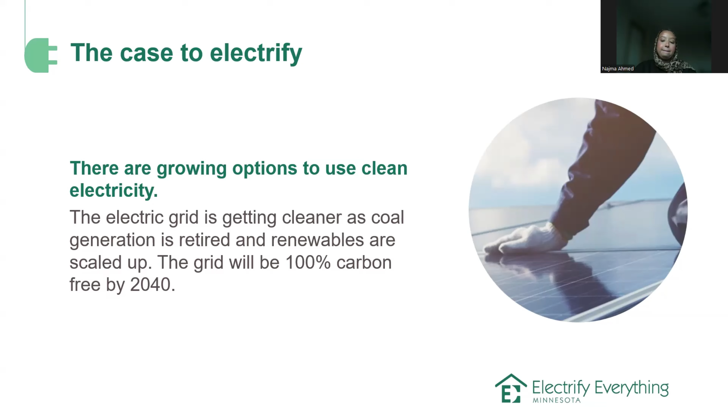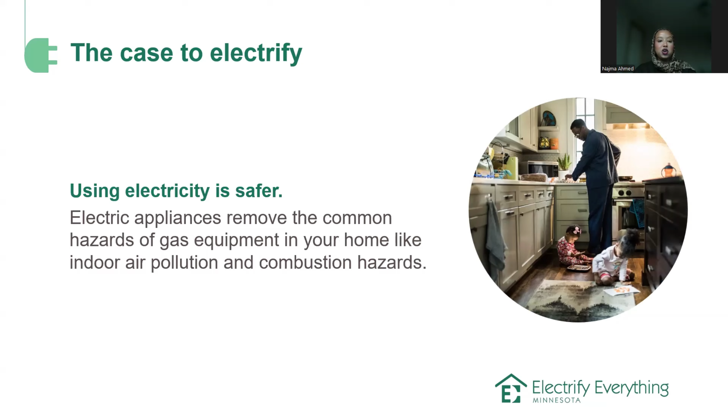Another reason why we should electrify is that using electricity is safer. Electric appliances remove the common hazards of gas equipment in your home, like indoor air pollution and combustion hazards that gas appliances leave behind, which in general are not safe for us. So it's much safer electrifying your home.

Another reason is that electricity rates are more stable. Electricity rates historically grow at an incremental pace, while fossil fuel prices like natural gas have had much more fluctuation. One reason is that electricity prices are regulated by the State Public Utilities Commission, so they have to mitigate prices and rates, whereas gas prices depend on other factors such as supply and demand, global markets, and other events.

Lastly, another reason why we should electrify is that electrifying our homes makes a difference for the health of people and planet. I talked earlier about safety and how it has an impact on our health, and how gas releases indoor air pollution. But another reason is the planet. If you're someone who cares about climate change as well as the negative impact we're leaving on the planet, I think this is a great way to contribute positively to change.

Now that we know what electrification is and why we should electrify, there's one challenge to it, and that is electrification can be confusing. If this is your first time hearing this word or you're starting out your projects, homeowners often have a lot of questions. Some of these are: how do I decide which projects to pursue? Earlier, I mentioned this is a gradual process, so deciding which project to start with first and which to prioritize is one challenge people often face.

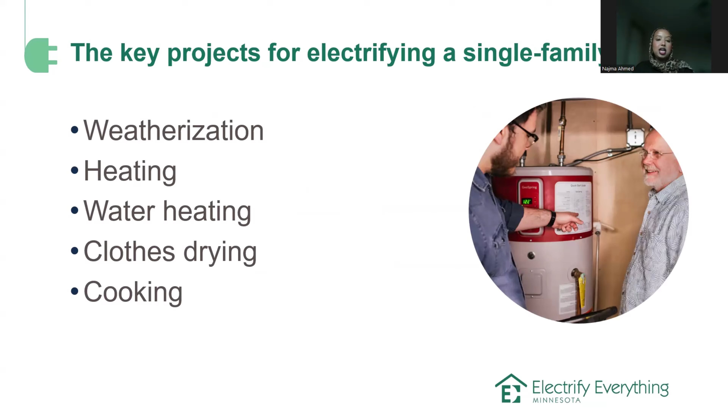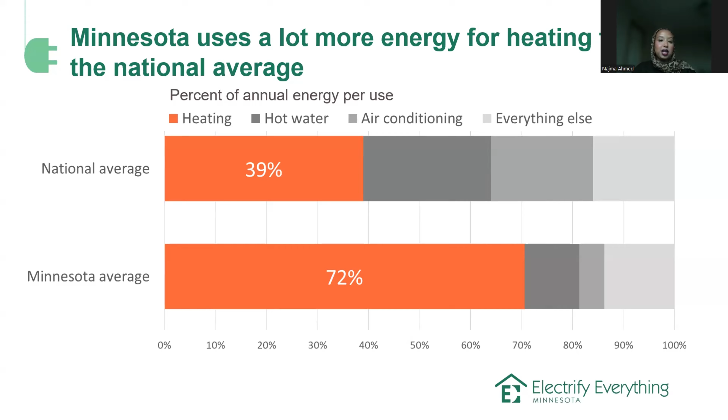The key projects for electrifying a single family home are weatherization, heating, water heating, clothes drying, and cooking. So why do we talk about weatherization when we talk about electrification? Because 72% of the energy usage in Minnesota goes towards heating the average home, simply because we have harsh winter months. Compare that to the national average of 39%. Overall, Minnesota uses a lot more energy for heating than the national average.

Two questions come up when we talk about how to save energy and boost sustainability: how much heat do our homes need, and how are we providing that heat? Weatherization involves improving the parts of the home that keep heated or cooled air from escaping, making sure air inside your home remains inside and outside air doesn't come in. We're talking about insulating your walls and attics, the fluffy stuff in your attic, air sealing to prevent air leaks, and treating windows, as weatherization makes electrification easier and more effective.

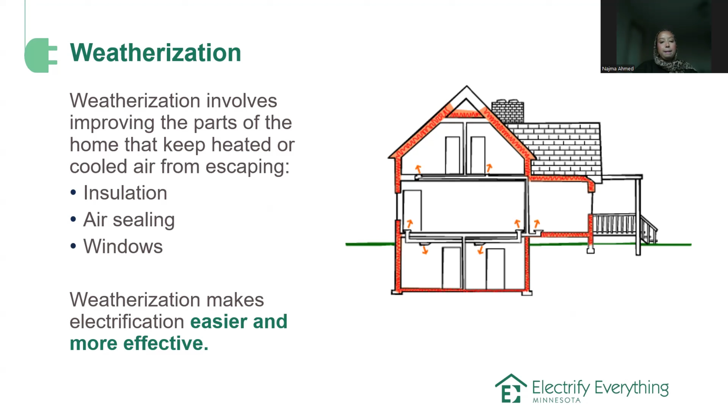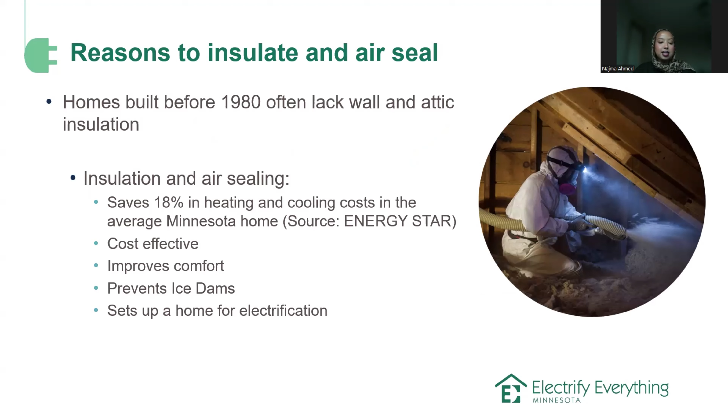Reasons to insulate and air seal are that homes built prior to 1980 often lack wall and attic insulation. A home that's well insulated and air sealed saves you about 18% in heating and cooling costs in Minnesota. It's cost effective, it improves comfort, it prevents ice dams, and lastly, it sets up your home for electrification.

Air sealing is making sure there aren't little nooks and crannies in your home where air can escape or come in, which is why air sealing is an essential part of insulation work. Common areas where air leaks happen include attic hatches, areas around lighting, vents and chimneys, and rim joists in basements. Lastly, mechanical ventilation like continuous bath fans maintains healthy indoor air quality in a well-sealed home.

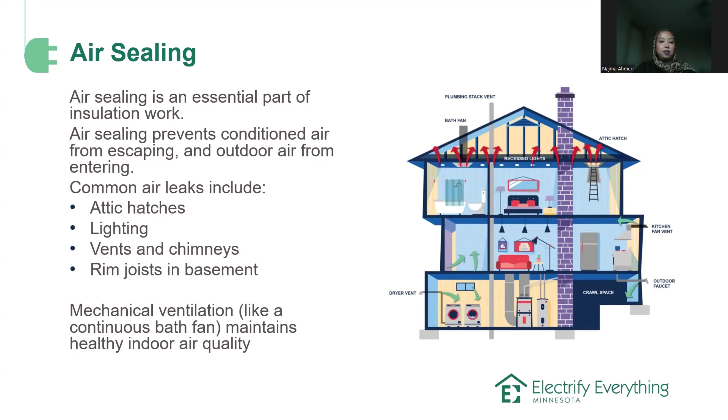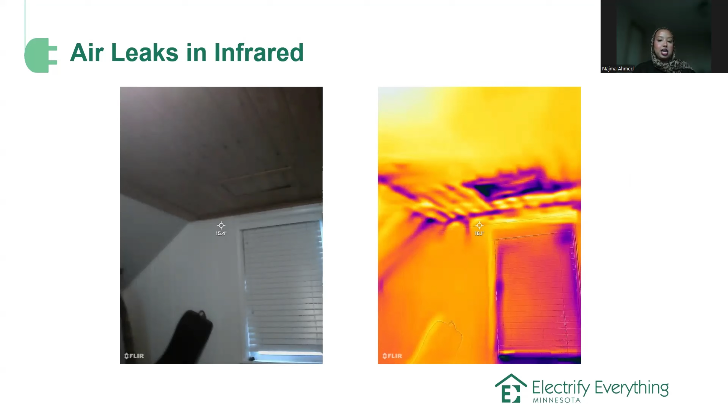Weatherization is critical before addressing heating because weatherization makes electrifying your home's heating much more affordable and effective, and it reduces heating load an average of 18%. So a heat pump can work more effectively.

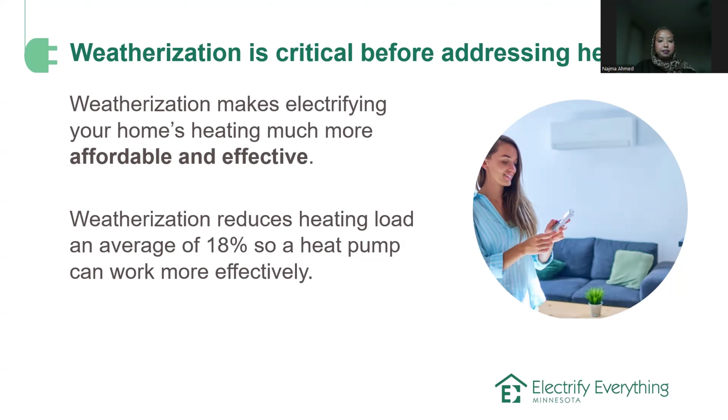Okay, so Najma mentioned these two questions about saving energy. How much heat do our homes need? How can we reduce the amount of heat and energy that we use to heat our homes? And the second question is, how are we providing that heat? And I'm going to talk a little bit about that. So next slide.

Okay, first of all, my question for you all, and you can respond either in the chat, you can type up an answer, you can use the React. There's a little graphic heart at the bottom. Do a react. Put something in the chat. Let me know if you've heard of heat pumps or not, or maybe a little bit, yes, but a little.

Okay, I see a green check mark. Laughing, crying emoji. Good. I don't know what that means, but you know. Oh, it's a thumbs up.

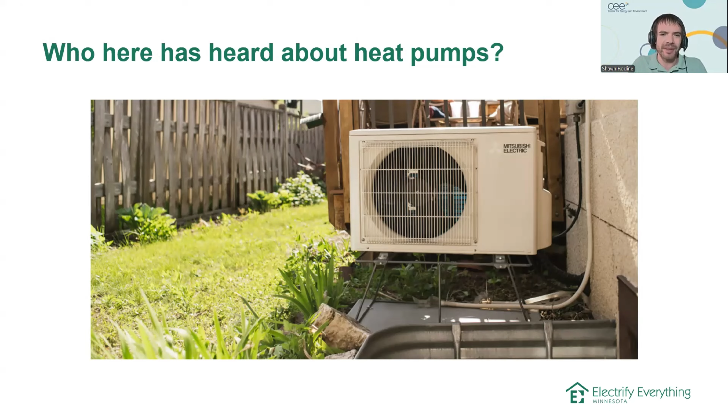Okay, great. Okay, so we got a couple people who've heard about heat pumps. And if you haven't, well, you're in the right place. Next slide.

So heat pumps are pretty cool and also very warm in that they're a very efficient technology, but they're not necessarily revolutionary because a heat pump, what it essentially does is it moves heat or pumps heat through refrigerant like a two-way air conditioner. So if you had a heat pump in your home right now, it's still summer, still in the 80s. Your heat pump would work like an air conditioner. It would pull heat from the inside of your home and pump it outside and then cool the air that is inside your home. And that's what an air conditioner does.

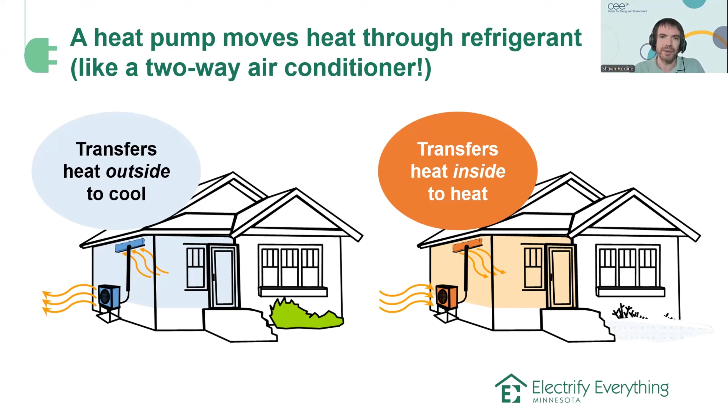You can stand on the outside of an air conditioner and feel that warm air being blown out of a building. However, I said it works like a two-way air conditioner because heat pumps also can heat your home. They can do the exact same thing when the temperatures drop and you need heat inside your home to keep it comfortable. They use that same refrigerant to extract heat from the outdoors and they move that refrigerant through some tubes into your home, keeping your home warm. So that's why we say it's like a two-way air conditioner. It's moving heat from one place to another, depending on the season.

One of the big advantages of heat pumps is that they're flexible and they work in a lot of different types of setups in homes. And the two major types of heat pumps are ducted and ductless. I don't know if all of you live in Eagan, but I know Eagan is probably predominantly a central AC system. So you would look at a ducted or central system. This is common with central AC or with furnaces. And in fact, a heat pump, if you were to install one, would replace your central AC because, like I said, it does the exact same thing.

So this is what a unit setup looks like. The outdoor unit actually looks pretty similar to what a central AC unit would look like, kind of like a cube. Although you can notice it's sitting on a stand, and that is so that it can run in the winter without being inundated with snow. So that's really the only difference. But the indoor unit sits above the furnace. It's the same as your central AC system. So on the surface of things, it doesn't look that different. And then those refrigerant lines are the path through which it moves that heat either in or out, depending on the season. And then it integrates into your central AC system, much like your current setup. Next slide.

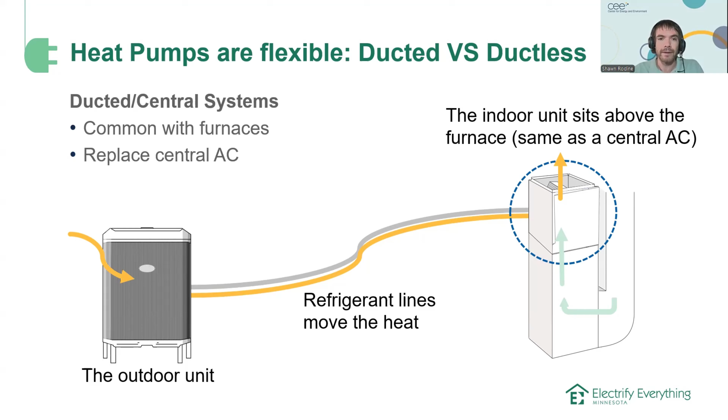So say you don't have a central AC system, you have a boiler or electric baseboards, then you would choose a ductless or a mini split system. These are common with boilers or baseboards and homes without central AC or without ducted systems.

So our outdoor unit looks a little bit different. We say it looks like a giant suitcase, but also notice it's on that stand. It's sitting elevated as well, so it can work in the winter. But it also uses refrigerant lines to move that heat.

And then the indoor unit also looks a little bit different. Those things are called heads or cassettes, and they usually sit on the upper part of a wall in different rooms or zones of the home, depending on where you want to heat and cool. Next slide.

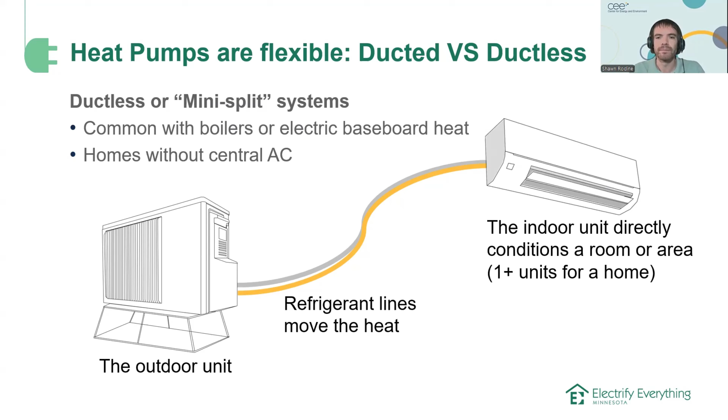One thing to know about heat pumps is that they are very efficient, most efficient in either hot to cool weather. In fact, depending on the conditions, a heat pump can be anywhere from 150% to 400% efficient. That means it produces 4 units of energy for every 1 unit that it consumes, or 1.5 units for every unit it consumes. But that depends on those conditions that I mentioned.

So this graph, on the horizontal axis, we have the outdoor temperature between 65 degrees and -15 degrees. And on the vertical axis, we have the amount of heating that's being provided, measured in BTUs, British thermal units, just amount of heat per hour. So at 65 degrees, our heat pump is providing about 40,000 BTUs per hour.

But we see as the temperatures drop, 55, 45, 35, all the way down to -15, which it sometimes gets that cold here. Rarely, but it does get down there. The heat pump isn't quite as efficient, and that's because, like I said, it's pulling heat from the outdoor air to heat your home. And as it gets colder, there's just less heat in the air. So the heat pump has to work harder to provide the same amount of heat. So very efficient at hot to cool temperatures, but as the temperature drops, the efficiency does go down. Next slide.

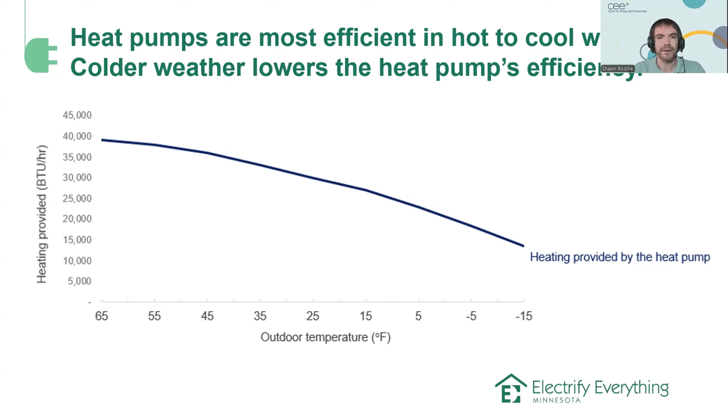But the good news is, even in Minnesota, which is pretty cold for the continental US, some of the coldest winters, and some of the longest heating season temperatures, 80% of the time we're actually above 20 degrees. We tend to think of the heating season as being really, really cold, but it starts in September, October, depending on the year, and then can go all the way till April, perhaps May. And so that's a long season.

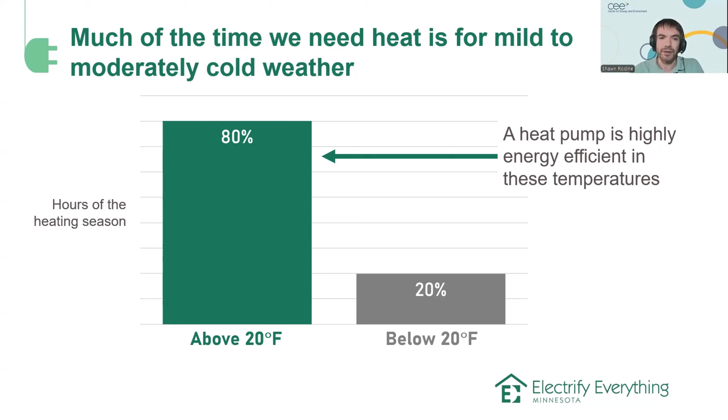So the brutal temperatures are relatively short. Most of our time we're above 20 degrees, and a heat pump can work really efficiently above 20 degrees. So that's the good news for heat pumps. Next slide.

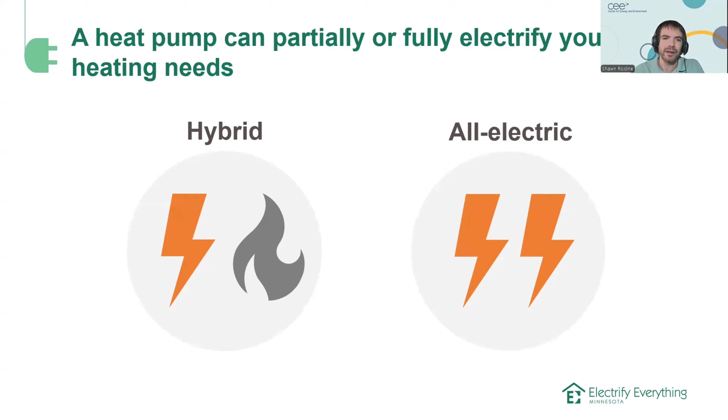Okay, we talked a little bit about their efficiency and how they work. Let's talk about how they can partially or fully electrify your heating needs, depending on if you have a hybrid or an all-electric system. Next slide.

So a hybrid system. A hybrid system is an electric heat pump paired with a fossil fuel system, commonly a furnace or a boiler. Some of the benefits of this type of setup is that they can keep energy bills neutral, or they can actually lower energy bills depending on a lot of different factors. Most people do see either cost parity or lower bills.

And it can also significantly reduce your household carbon emissions if that's your goal, because say your air source heat pump is running 80% of the time or 80% of those heating hours. That 80% was previously done by either your furnace or your boiler, and instead it's being done by electricity. So that's a significant reduction.

The drawbacks are that the setup can be complicated depending on the existing equipment. If you have a boiler, sometimes you have to have two sets of controls for the two systems. Some furnaces may or may not be compatible. Most modern furnaces are, but you always want to consult a contractor to find out if your system will be compatible or if you might have to consider or do a replacement. Next slide.

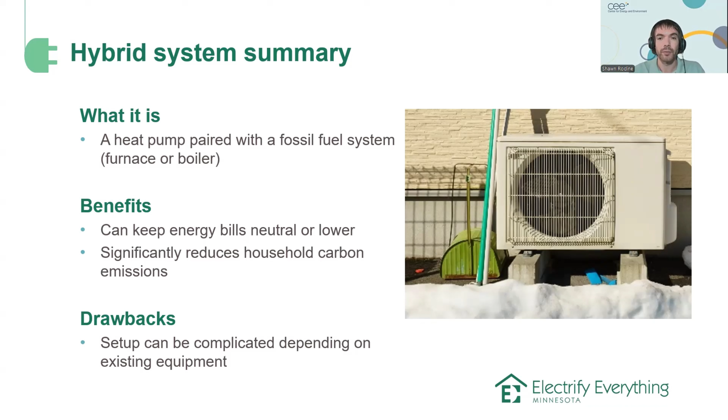So this is how the heating and cooling with a hybrid system works throughout the year. In the summer, like I said before, your heat pump will be cooling just like an air conditioner. In the fall, the heat pump will start to heat your home.

In the winter, or at least the coldest parts of winter, we could say, depending on the heat pump, but we'll say below 20 degrees, the furnace is doing the heating. Heat pump might step in here or there. But in the spring, when the temperatures rise, the heat pump will pick up the heating duties once again. Next slide.

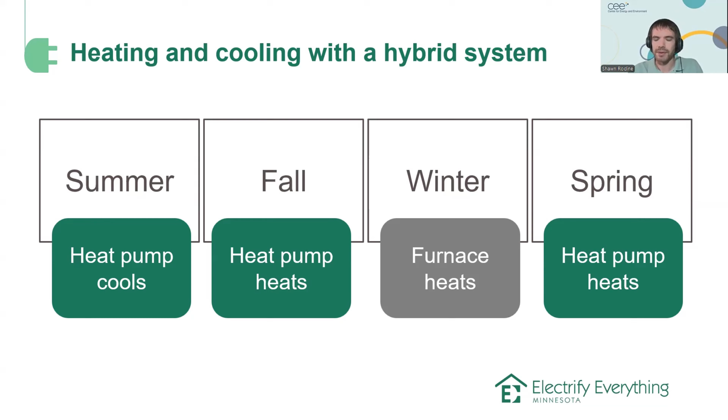What about an all-electric system? Well, an all-electric system is that same heat pump, but paired with an electric plenum, or what's essentially an electric resistance system, or an electric furnace. The benefits are that this can be simpler to set up because it's electricity talking to electricity, one integrated electric system. And again, if your motivations are to reduce carbon emissions, then this is the way to maximally or to

most do that. The drawbacks are that your winter heating bills will be more expensive because generally speaking, at least in the winter, it's cheaper to heat with natural gas than with electricity. In the shoulder season, that can be a different story. But the second part of this is that a cold climate heat pump will be necessary for you.

High efficiency heat pump, which does have higher upfront costs, but if you want to take advantage of some of those incentives that we're going to mention later on in the presentation, then you'll need to get a cold climate heat pump to get the incentives. So there's a little bit of trade-off, and they are more efficient, so the operating cost could be lower, but they are more expensive up front. Next slide.

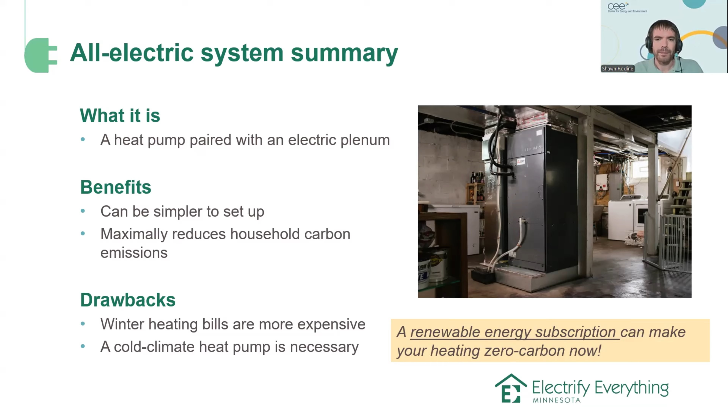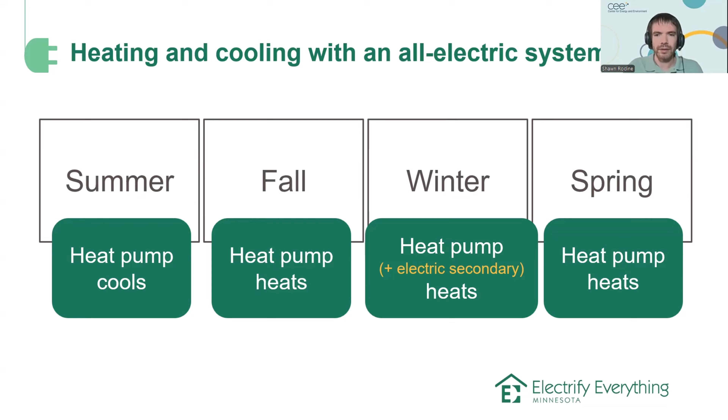And the heating and cooling with this all-electric system looks very similar. In the summer, the heat pump is cooling. In the fall, it starts heating. In the winter, the heat pump will trade places with the electric secondary heat, with that electric plenum. And then in the spring, the heat pump can once again do the heating for the home. Next slide.

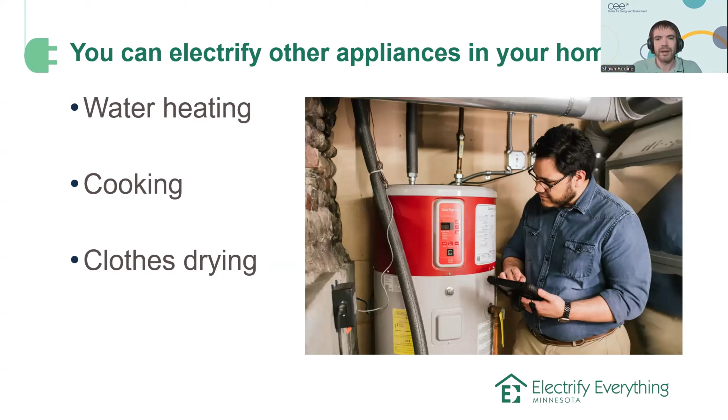And we talked about other projects, so that's heating, but we have more to talk about. So we're going to go into water heating, cooking, and clothes drying. And Najma, this is where I pass it off to you. Thank you, Shawn. So how do we heat our water?

Heat pump water heaters are very energy efficient. They are over 3 times more energy efficient than the traditional electric tanks. And they're much safer than gas, simply because they do not release combustion byproducts into the air like standard gas would.

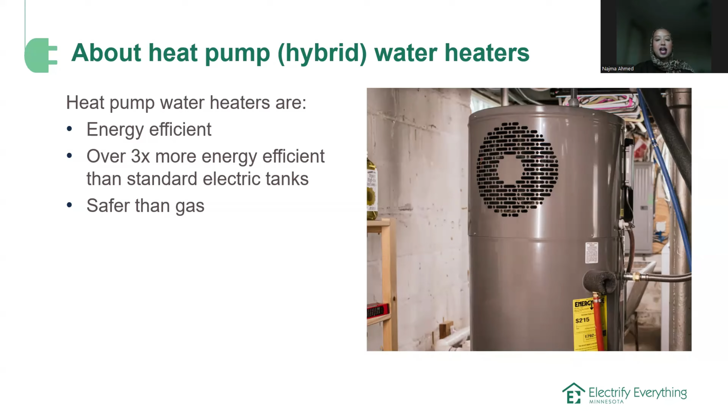And how they work is very simple. Like a lot of heat pump appliances, they use this cool technology that extracts heat from the surrounding air. Cold water goes in, and then that extracted heat from the surrounding air heats your water. And then at the other end of the heat pump, cool, dry air is discharged and hot water goes out to the rest of your home for you to use.

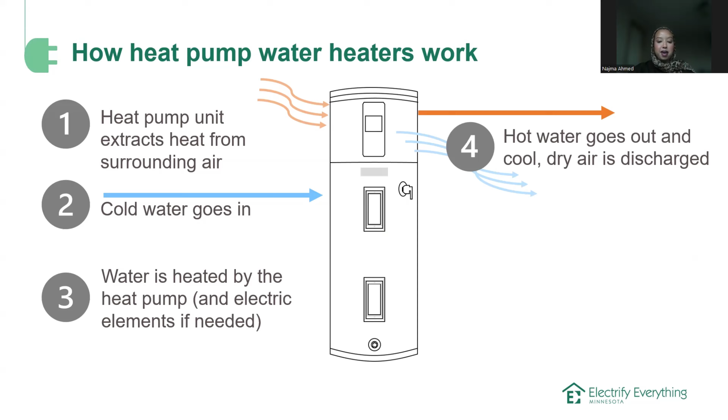And another cool thing about heat pump water heaters is that they also have electric resistance rods inside them that act as a booster and heat water if there's a high demand for it. With a heat pump water heater, you can save a lot. Compared to the standard electric water heater, you'll save between $300 to $500 yearly, and that's simply because they're very energy efficient and people love them for that.

And then compared to the traditional gas water heaters, with a heat pump water heater, you'll break even or save up to $175 yearly. And that is because gas rates are not similar to electric rates.

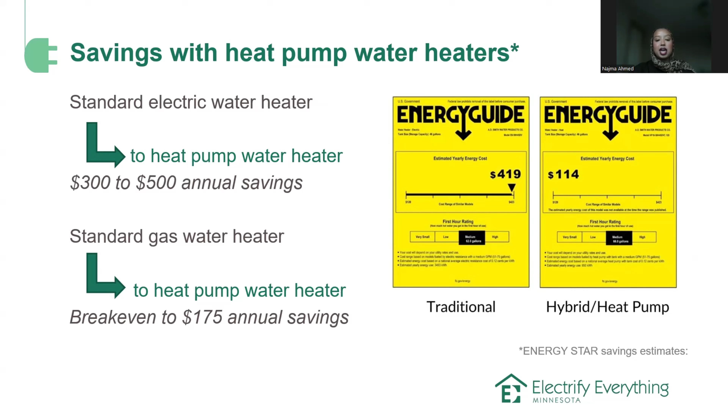Another big energy usage in our home is cooking appliances. In this case, induction ranges or induction stoves are very common nowadays, primarily because they're a solution to our cooking needs. They're very energy efficient. And the way they work is that they transfer energy directly to the cooking pan through a magnetic field. They boil water very quickly, about 1 quart of water in like 2 minutes.

Another good alternative is the traditional electric range. They create heat by running a current through a heating element. They either come with the coils or they have a glass top. They are also very widely available and affordable. They have been around for a really long time. They are less energy efficient than the induction range, and they may be slower to warm up and cool down.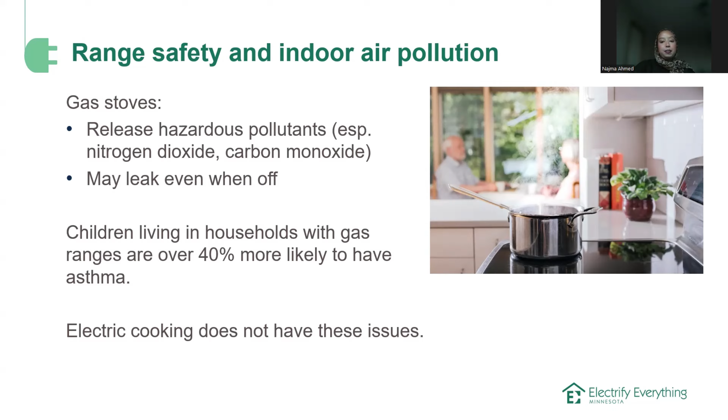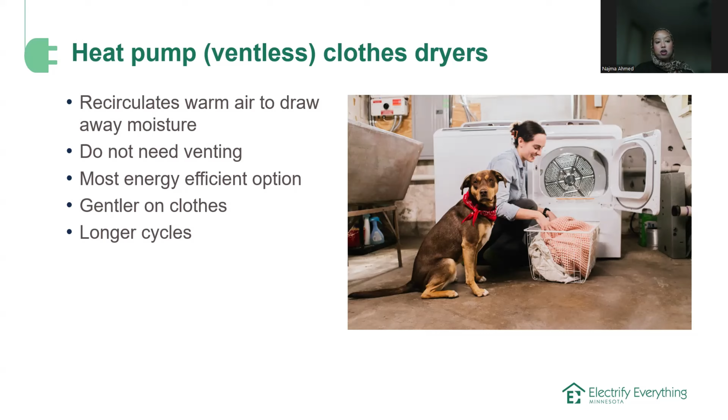They're the most energy efficient option. They're gentler on clothes; however, they have longer cycles compared to traditional clothes dryers that dry clothes in between 45 minutes to an hour. These take about an hour to an hour and a half.

Another option is electric resistance dryers. They use heat from electric coils. They also dry clothes very quickly. However, they need venting to the outside, and they're very widely available and affordable to buy. But they use two times more electricity than a heat pump dryer would.

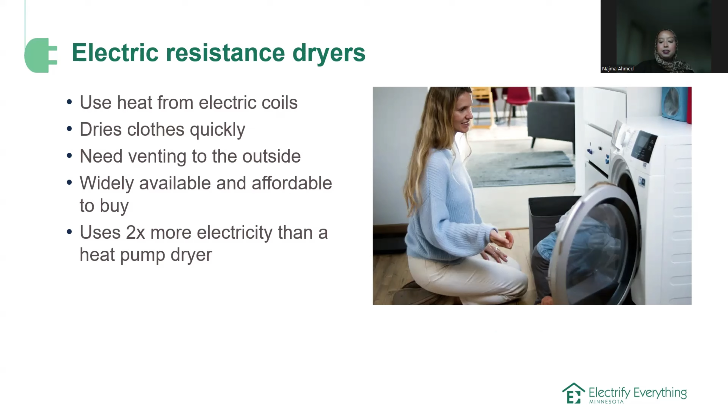Now I'm going to pass it back to Shawn to talk about how you can get your home ready for electrification. Thank you, Najma. Next slide.

So we know that this all sounds very exciting and you're probably all ready to jump in, but the truth is that some of your homes may need pre-work before electrifying, especially if they're older homes. Common upgrades needed by older homes are modern wiring. If you have knob and tube wiring in your home, you'll almost certainly need to replace that before you start to electrify, and an upgraded service panel.

Depending on the size of your service panel, you may or may not be able to take on more electrical load. If you have a panel that says it's 60 amps, you will certainly need to upsize, and that's mostly for homes that are pretty old. 100 amps is pretty common, and that depends on your home and your goal. How much of your home do you want to electrify? Do you want to buy a jacuzzi or a sauna or something else alongside your other electric appliances? You'll want to think about that when deciding whether to upgrade or not.

And if you have a panel that is between 150 and 200 amps, upsizing is unlikely. But as always, we advise you to consult an electrician regarding the needs for your home, and they can tell you, based on your current load, your panel size, and your future plans, what you may need.

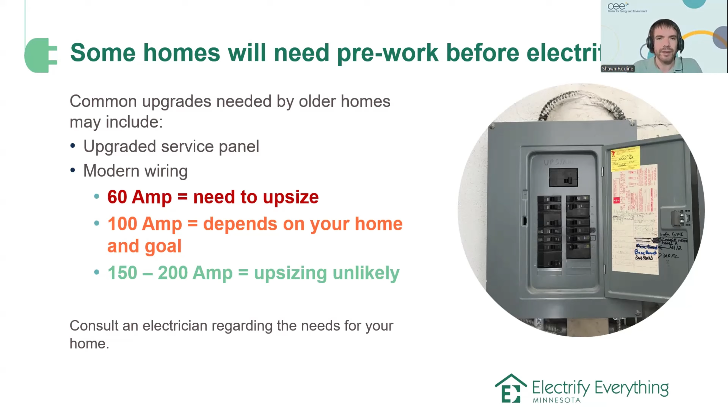As I mentioned, aside from knob and tube wiring, electrifying appliances may also require different types of wiring. Switching from gas to electric appliances often, but not always, requires 240 volt wiring, and certainly capping gas lines. For heat pump water heaters, many models are 240 volts, but there are more and more 120 volt water heaters available. So you should look into whether one of those could meet your household needs, and if you don't have a 240 volt outlet, you may save yourself some electrical work.

Electric stoves, whether induction or traditional, almost always require 240 volt outlets. I think there's one stove that doesn't require it, but it has a big battery pack and it's about $6,000 currently. So that's an option, but most of them, because of the power they draw, will almost certainly need the 240 volts.

And then with an electric clothes dryer, most one-for-one replacements will require 240 volts. There are 120 volt models available. They tend to be smaller, and that may work for you and your household, but you'll want to look into that and do some research before choosing one of those models.

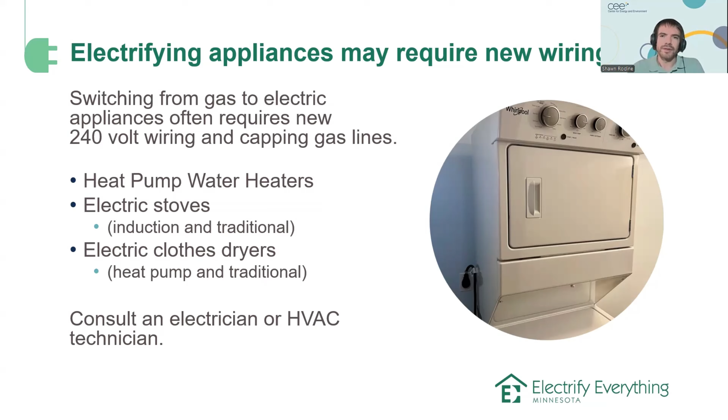And again, talk to an electrician or an HVAC technician about your household size and how many loads of laundry you do or how many showers people are taking, and they can guide you toward options that will fit your needs. Next slide.

All right, let's talk about money. So for a lot of these things, of course, I just mentioned the wiring, and the appliances, they all cost money. So there are different types of incentives available. If you look to the left of this table, there are utility rebates, and I know you have a variety of utilities in Eagan: CenterPoint, Xcel, Dakota Electric, and MERC. They all have different rebates for different products, depending if they're gas or electric.

And then expected in 2027 will be state rebates and federal rebates that, if you want to know about them, stay tuned with the City of Eagan, or you can look at the Department of Commerce website. They've been on hold for a while, but that is where you can go for the latest information.

For the different technologies, we have estimated costs of these and what incentives are available. We don't have the utilities, but you'll have to look at your utility and see if it meets this number or a different number. But insulation, air sealing, depending on what you need to do, is it your walls, your attic, how much you need, it can be between 7 and 13,500, and there's up to 3,000 available.

For an air source heat pump, it also varies widely depending on the area of your home, how big your home is, if you want a ductless or a ducted system, but 12 to 24,000. My parents got one this past year and it was 18,000, so it was right in there. There's up to 2,200 available through the utilities. Heat pump water heater, that'll run you between 4 and 7,000, and there's up to $500 available.

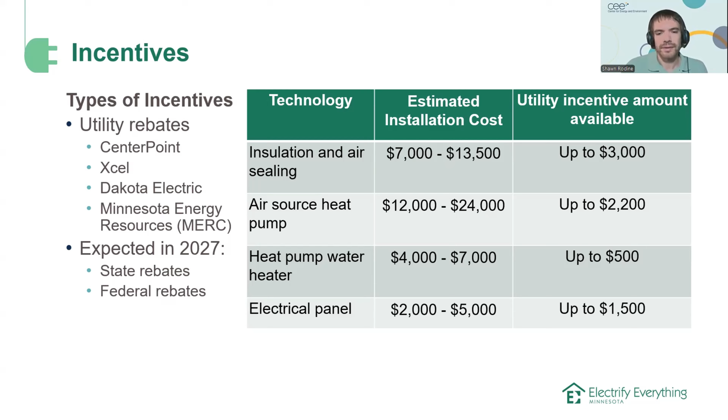And if you need that panel upgrade, those costs can vary widely. I would say probably maybe on the higher end of that 2 to 5,000, but it really just depends. But up to 1,500 is available currently for those incentives. All right, next slide.

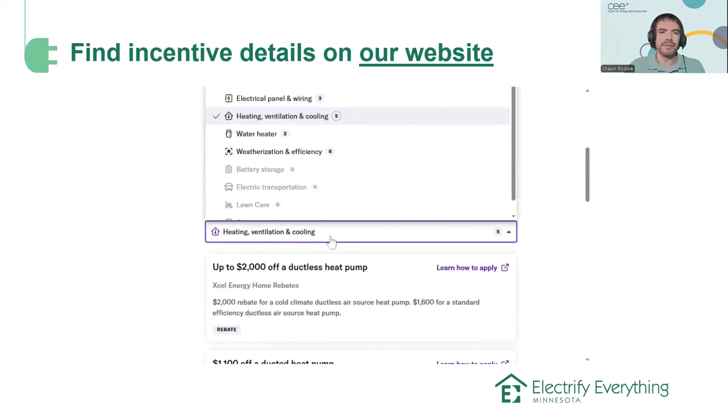All right, and if you want to kind of maybe skip doing the research and find all these incentive amounts in one convenient place, you can go to our website and we have this Rewiring America calculator that can tell you what incentives are available based on the utilities that are present in your zip code.

So let me see if I can, if you want to stop sharing, I can pull this up. Najma. And okay, let me share my screen. It's taking a minute. Let's see. Let's see if this works.

Okay. So you go to this web page, Electrify Everything Minnesota, and you can find this calculator here. So you'd put in, are you a homeowner or a renter? And then your zip code. Looks like I already punched one in. I looked up an Eagan zip code. It's very easy. 55123. So very easy to remember. And this is telling me my electric utility is Dakota Electric, Minnesota Energy Resources.

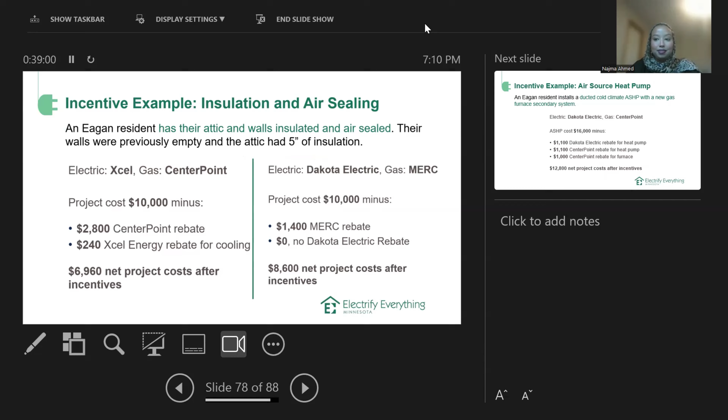Looks like I can see it in presenter mode, Najma. Oh, 1 second. How about now? All right, looks great. So let's see.

So we have some examples here of what this looks like. This is an insulation air sealing example. This Eagan resident has their attic and walls insulated and air sealed. Their walls were previously empty. This is a very old house, and the attic only had 5 inches of insulation. So they were probably just paying a lot to heat the outdoors. So if their electric utility is Xcel and their gas is CenterPoint.

Their project, say it costs $10,000 with a $2,800 rebate from CenterPoint and $240 from Xcel, that lowers their project costs to just shy of $7,000. Not too bad. If they have Dakota Electric and MERC, that same $10,000 project, $1,400 from MERC, and unfortunately, Dakota does not provide an insulation air sealing rebate. So that's $8,600 net project cost after incentives.

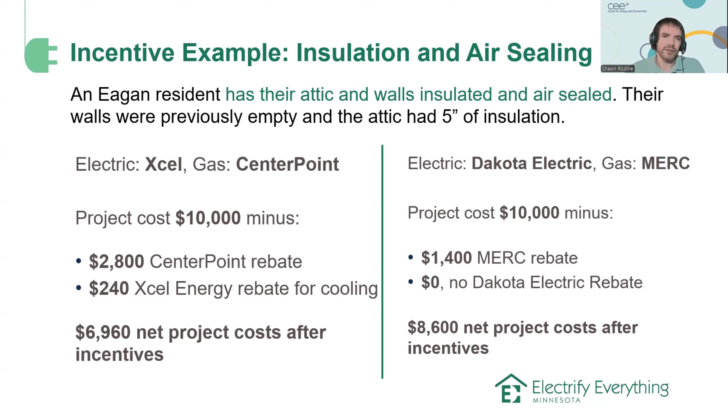And I also encourage you, Najma will talk about home energy squad visits and energy audits, but even if your home is newer and has insulation, I would tell you to check and make sure that it's air sealed, because I've done energy audits on homes that were quite new, maybe built in the 90s, and they had plenty of insulation, but you could tell the air sealing was not done correctly and was causing some problems for the home. So even if your home is newer, don't assume; the best thing to do is to get it checked out. So, okay, next slide.

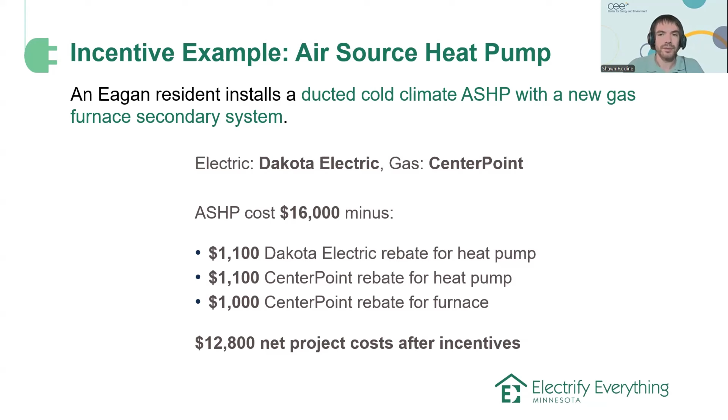Here's an air source heat pump example. An Eagan resident installs a ducted cold climate air source heat pump, and they get a new gas furnace as their secondary system. Their electric is Dakota Electric, their gas utility is CenterPoint. An air source heat pump, we'll say costs 16,000. They would get 1,100 from Dakota Electric, 1,100 from CenterPoint for the heat pump, and then CenterPoint also offers a rebate for the furnace, 1,000 for the furnace. So after the rebates, it's 12,800, down from 16,000. So some pretty substantial cash for this project. Next slide.